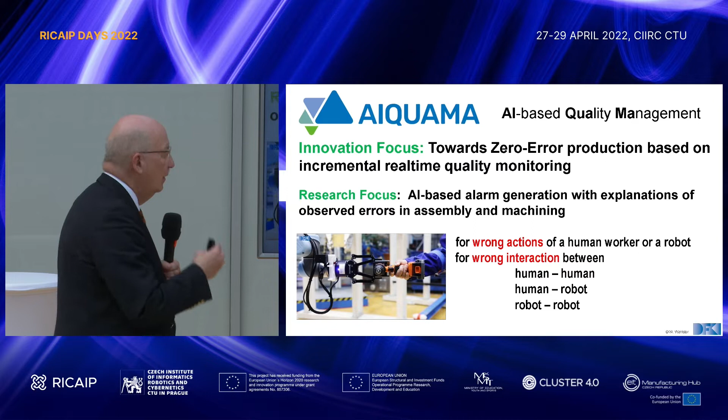It's a new approach. We don't just check the quality of the product through measurements and sensing, but we observe the actions, both of humans, human-to-human cooperation, human-robot, and even when robots work together, we check whether they do the right thing. So you see here in this diagram very nicely that we do wrong action recognition with cameras, with wearable sensors, with IoT devices, and even microphones.

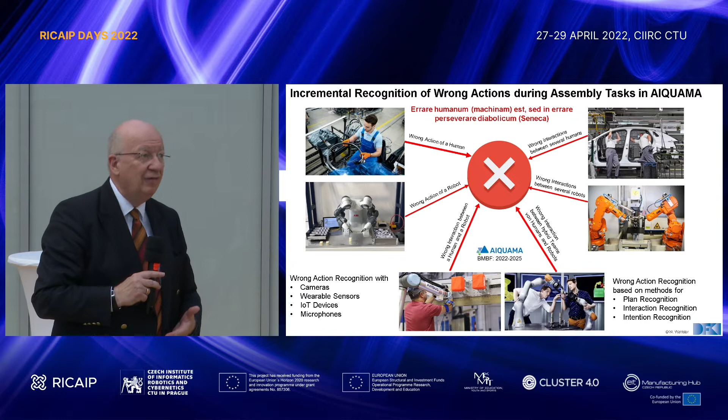This can be the individual action of one worker, a wrong step in the assembly, and this happens quite often, believe it or not. Even in really very professional companies like Bosch, we observed that in more than 20% of cases, there are people who make a little assembly error. Why? Because they have to produce so many variants that if they have 1 week of holiday, they come back and forget that this special variant should use another screw, for instance. So this happens.

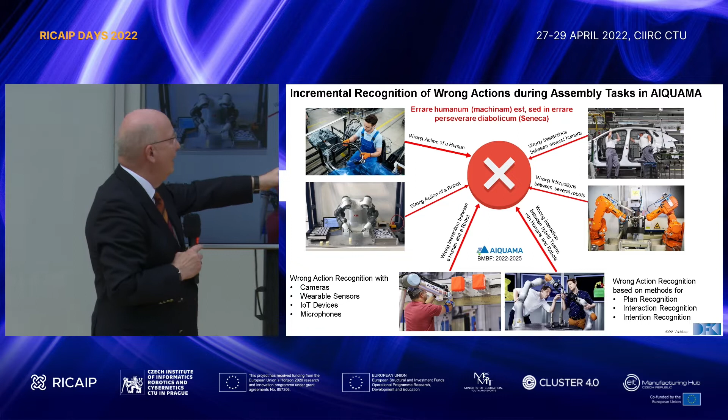So wrong action of a human. Then wrong action of a robot, also quite often. Wrong interaction between a human and a robot, or wrong interaction between two humans. If you go to assembly lines, you have workers working together. Or wrong interaction between several robots, or in the end, the most complex case, when we have hybrid teams of different robots and humans, of course things happen.

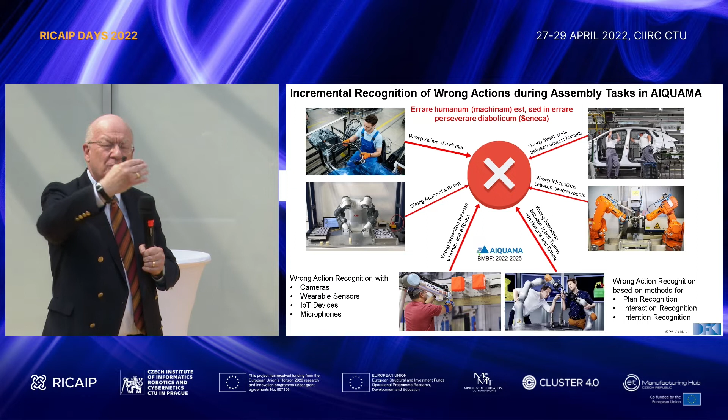And this is, from the AI point of view, the field of plan recognition. It's quite an advanced field which is connected to conferences on planning, automatic planning, but this is the inverse process, because now you have to recognize what plan is he following. Is this the correct plan or the wrong plan? And often it's the wrong plan.

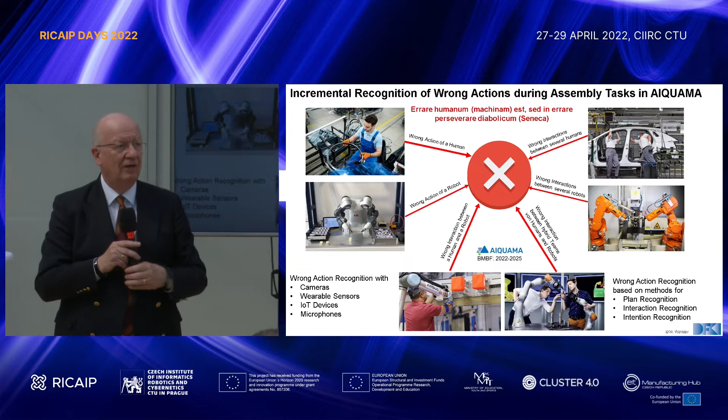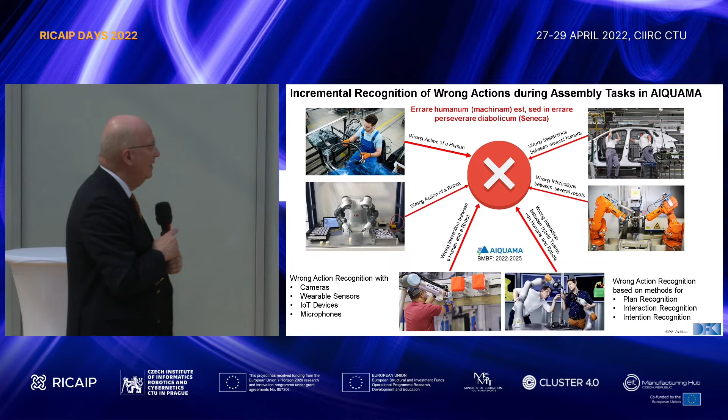Interaction recognition and even intention recognition, because if you observe that the worker does something which is not conforming directly to the plan, you have to find out what is his or her intention in this sense. Maybe it's a good idea to actually change the assembly plan in this specific situation. So that's the problem. How do we do this?

But anyway, the idea is to avoid this situation, which means we have smaller loops, very small loops. In every step, we check in real time whether the worker does the right thing or not. If not, then of course it will produce an error. This means we don't wait for the error effect, we look at the wrong action and then we correct. Look at the wrong action, correct, and correct, and correct.

That means we have n possible correction steps, but they are cheap because they happen just when the wrong thing has been done. So that's the idea. Why do we do this? We want to reduce the workload and the time needed for doing a correct product, reduce energy consumption, and address sustainability concerns.

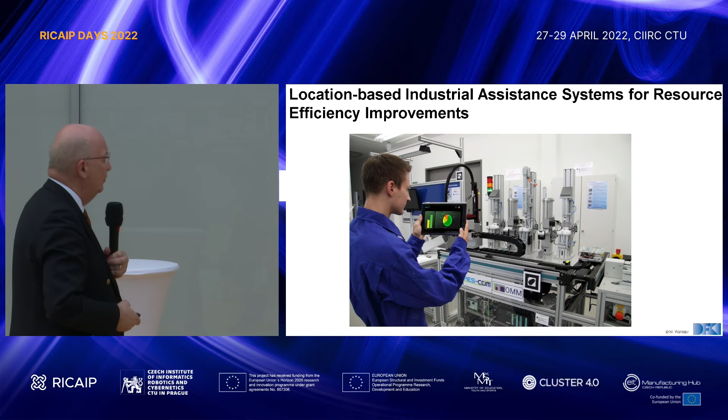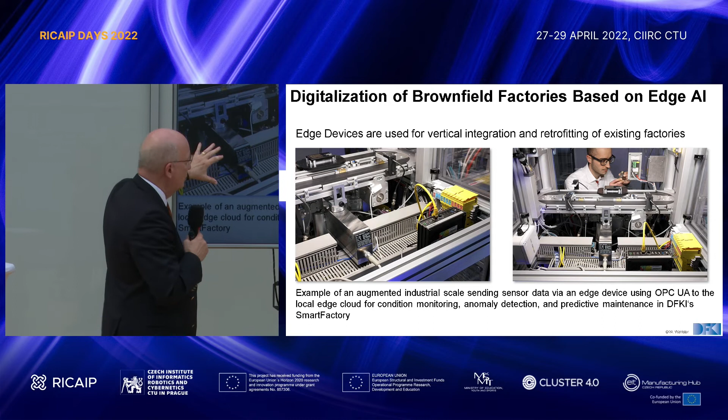Let me finish with some remarks on how edge computing is working. Even in a brownfield industry, we can add some devices so that a classical industrial scale, which we have here in the production process, is upgraded by having a small device there and connecting this with the local edge cloud by just a communication protocol like OPC UA, which is now the standard, so that we can do the retrofitting, turning an old factory, a legacy factory, into a modern smart factory.

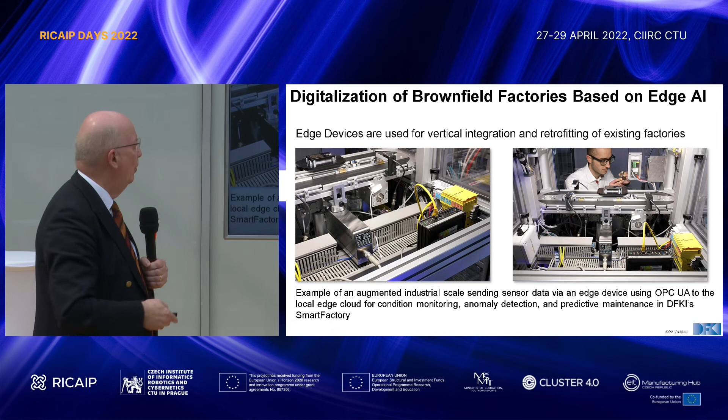And there are a lot of AI edge devices already on the market, and of course the sensors get cheaper and cheaper, so it's really realistic.

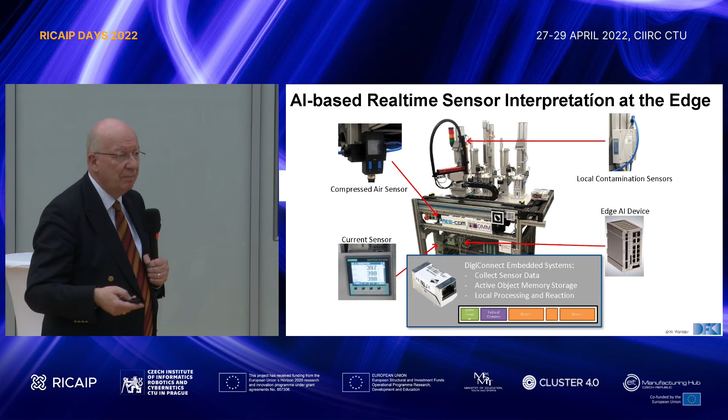Let me mention that at the beginning of Industry 4.0 we already said this, but it was a vision, hard to implement, and we still don't have the full stack implemented today with all these things. But we say the product becomes an information container. So, as I said at the beginning, it carries all the information about the complete supply chain in the life cycle. But very important from the multi-agent point of view, the product also becomes an agent.

It can also affect its own environment. For instance, such a product, and we implemented this, can tell the robotic gripper where to grip. You have an inverse function. Normally, the robot has to look and figure out where it should grip this special product. But in this case, the product itself tells the robot how to handle it.

Or the product becomes an observer and says, I monitor the environment, it's getting too hot here, for instance, please I need some cooling. We implemented this, for instance, in projects with Volkswagen in Wolfsburg, where we were actually able to reduce the energy consumption by more than 200 million euros per year.

200 million euros savings in energy. Why? Because these factories really wasted their energy in a certain sense. They run all the machines at full power, but there is no activity. It's like having workers run when no product is in front of them.

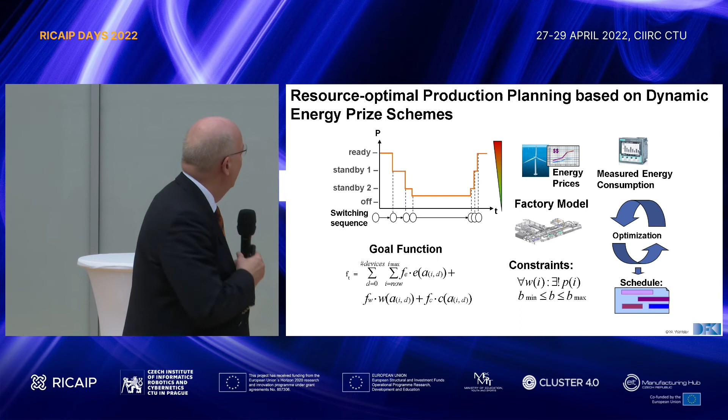Now we are more sensitive to energy consumption. We use really constraint processing, and we also introduce very simple but efficient ideas, that you have various standby modes which save energy. By looking at the incremental production plan, you can say this machine is not needed right now, but in about 10 seconds it should work, so you go to another level in the standby mode, because if you are in deep standby for some machines, it takes 2 or 3 minutes until they are ready to do the machining.

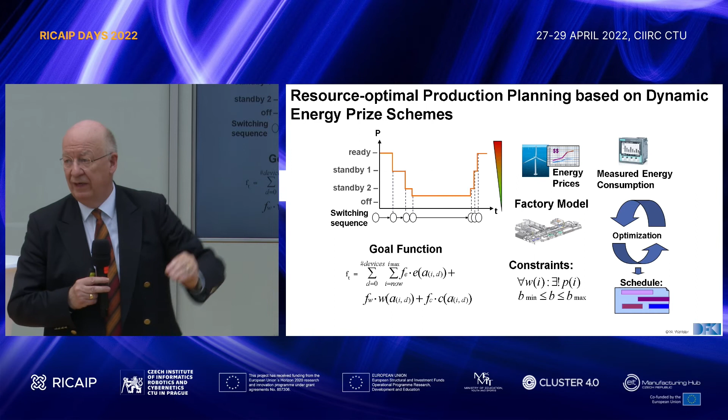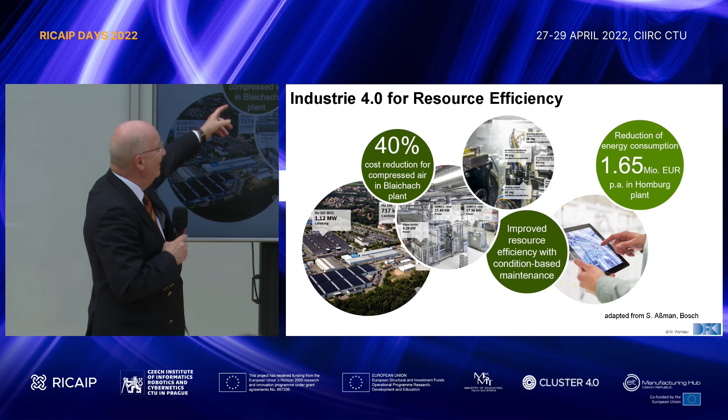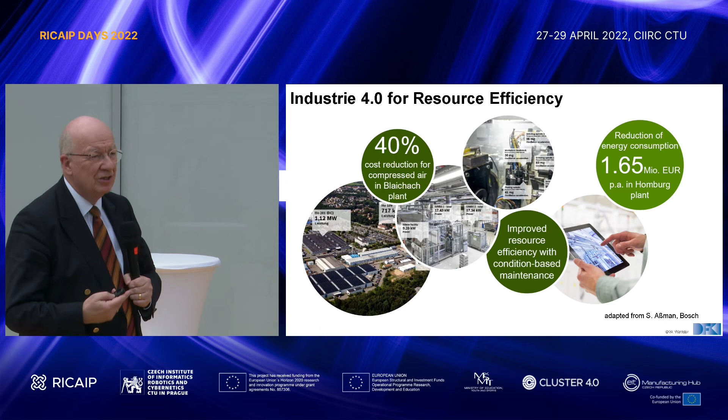So a more clever model—I cannot describe all the details, some are also confidential—but let me summarize that with Bosch, we did this not only for normal power but also for compressed air. Again, using digital twins and advanced planning algorithms from AI and optimization, we found you can reduce the cost of compressed air in one factory by 40%. You see how many possibilities there are, and as our politicians and society become more sensitive to this issue, I think it's a very good application of AI in Industry 4.0.

Let me finish with the following remark. We already had the first decade and a lot of success with this industrial internet. We have the first smart factories, but not all factories in Germany are smart—I think it's less than 20%. We have to be honest, it's a long way to go.

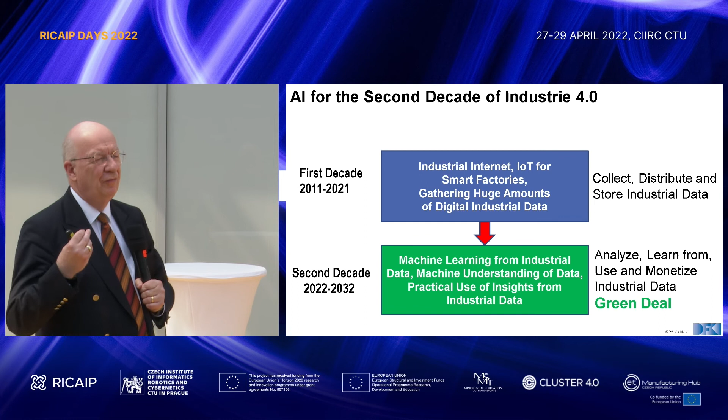There is a huge amount of industrial data available, but now we really have to use AI and machine learning for this industrial data, not only statistical learning but also machine understanding of what's going on. In AI, for instance, we have qualitative physics, where we can also reason about these things—this is extremely important, and we have the first approaches really running. This is the next decade.

One of the most interesting, low-hanging fruit areas is that normally in a factory you had specialists for logistics and intralogistics—many architectures and specialists on this. Then there are the planning guys for the production process, but they didn't work together. Even sometimes they were fighting, and this cannot go on.

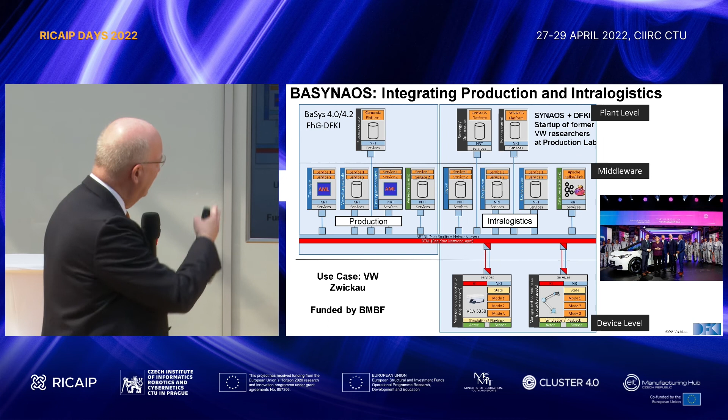Now we have the technology to integrate, and we have already done this in Zwickau. What we saw today here, with robots really bringing the emerging product to the individual machines, was one of the key ideas of Industry 4.0, and step by step it will be applied in the new factory for electrical cars. We have a test bed first in Dresden, but then this will be a product in Zwickau.

Very important. Let me conclude: Industrial AI is, in my mind, a key driver for the next generation of Industry 4.0. So artificial intelligence becomes even more important in the context of Industry 4.0.

Professor Mařík, I think it was a very good decision to put this here, because you already have the expertise—CIIRC from the beginning had robotics, cybernetics, and AI integrated. For the training of the large models, which we also need, we need sky computing, as I said, because here we need a massive amount of data, but not in real time. It should be transparently done in the cloud of cloud.

For online learning, of course, we cannot trust cloud or sky computing—we have to go to the edge AI approach. It needs very low latency, and we saw this here with 5G already implemented in the second stage of the test bed here. And finally, urban production.